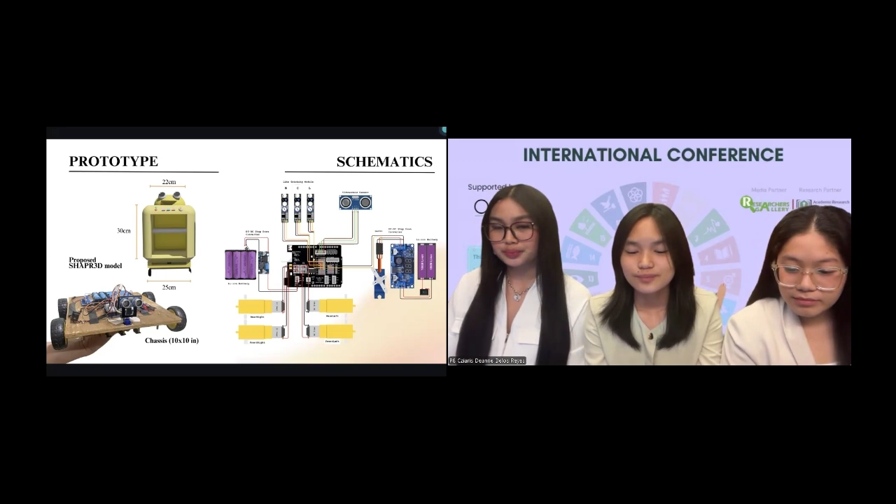The robot first starts from a starting point, and upon receiving a command from the button of the IR remote control, the robot follows a predefined track while continuously scanning for obstacles. Navigation decisions such as forward movement, turning, and stopping are determined by the program logic based on the real-time readings from the left, middle, and right line sensors. When the stop pattern, which is 111 at the delivery point, is detected, the robot stops and waits for a go-home command, then returns to the home point using the same line-following and obstacle avoidance logic.

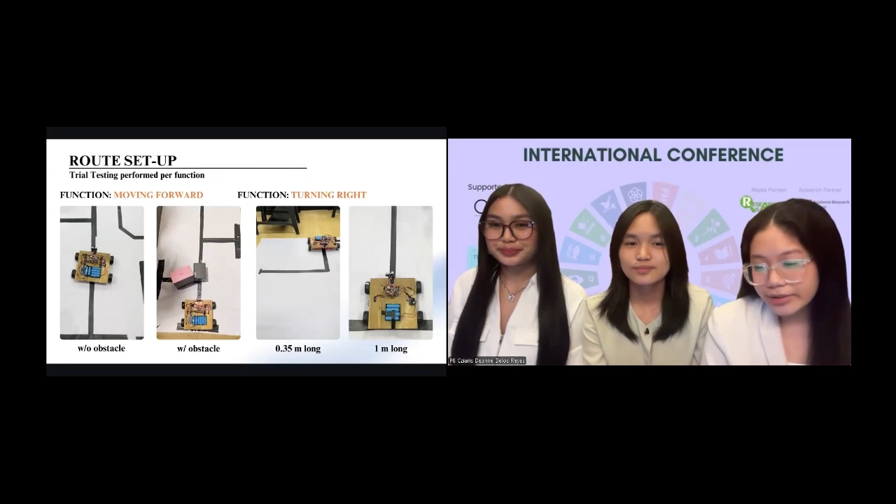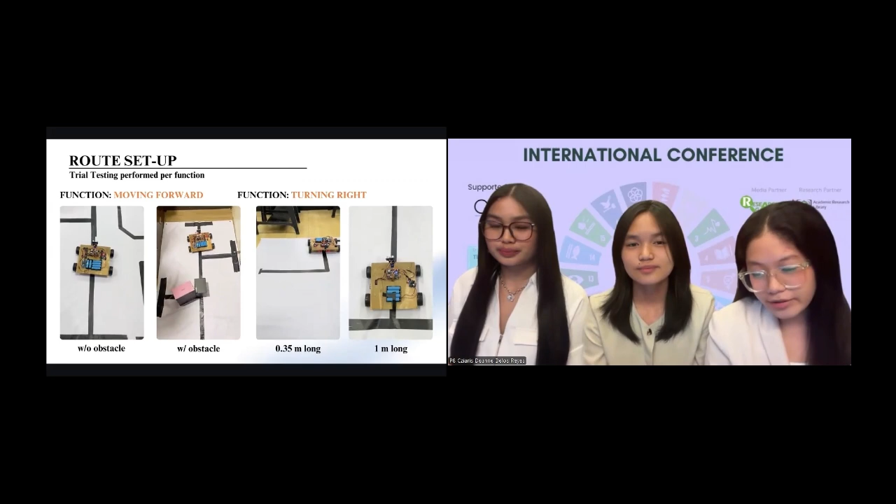As we proceed to data collection, the prototype underwent trial testing across 4 different conditions to evaluate its performance under various route distances. For our testing, we specifically performed the individual functions of moving forward and turning.

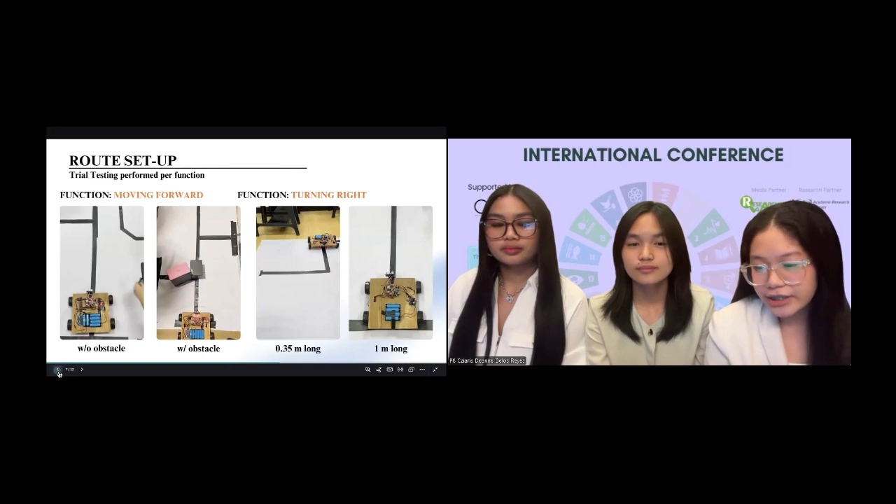For the function of moving forward, the robot achieved a 100% success rate without obstacles, demonstrating highly reliable and accurate path following under controlled conditions. Even with the introduction of obstacles, the robot maintained a 65% success rate, indicating a strong capability to adapt and navigate despite added complexity. This suggests the system remains functional and responsive in more challenging environments, supporting findings that mobile robots can sustain effective path tracking performance even as tasks require continuous adjustments.

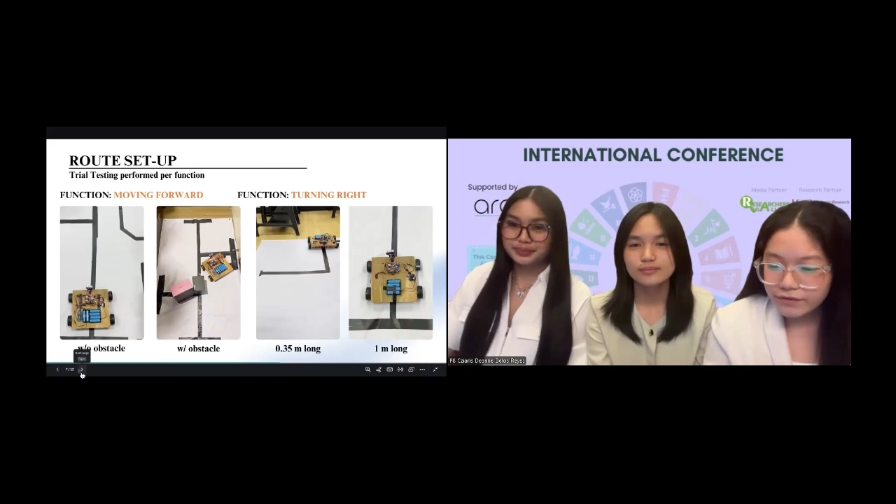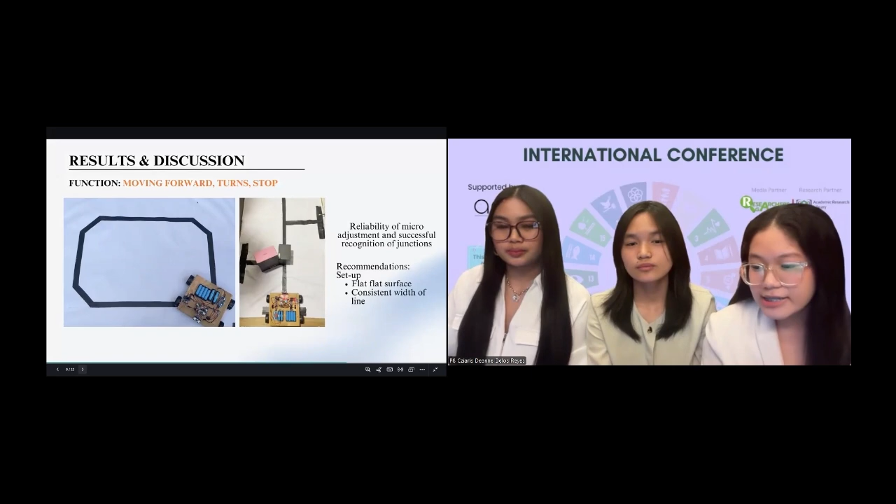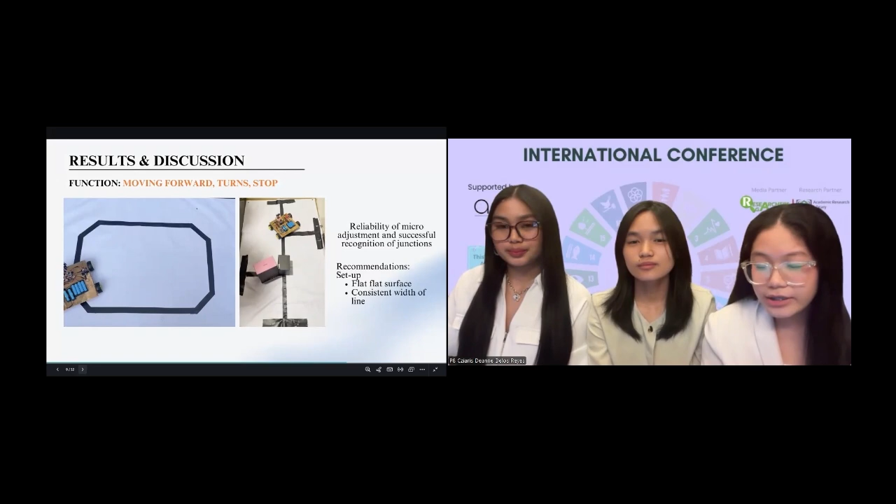For the function of turning right, the robot achieved a 95% success rate at a shorter route distance of 0.35 meters, indicating strong precision and consistency in executing turns over shorter paths. At a longer distance of 1 meter, the success rate decreased to 60%. However, this still reflects a moderate level of performance despite the increased complexity and longer navigation time. This suggests that the robot maintains its turning capability even as distance increases, though with expected variability due to accumulated path deviations. This is consistent with findings that path tracking accuracy tends to decrease as movement distance and track complexity increase.

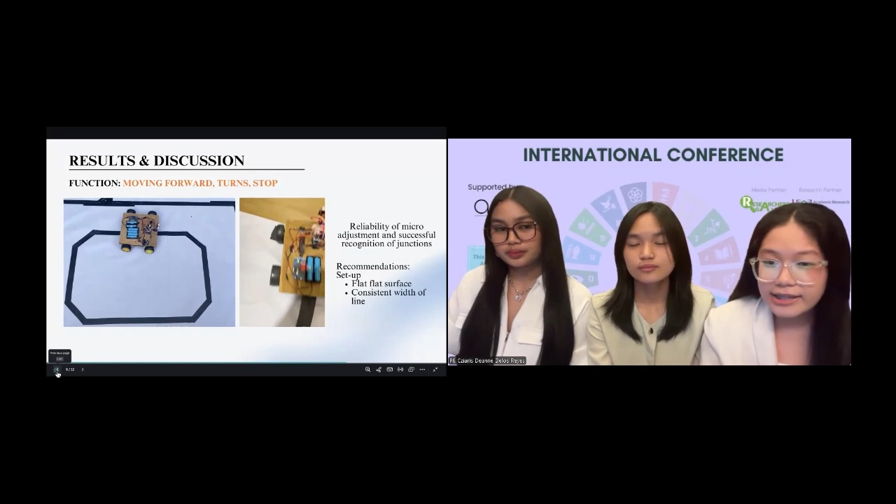Notably, the trials were divided into 4 sets with 5 trials each, and this set recorded the highest success rate among all sets, further supporting the reliability of observed results.

In addition, the prototype was tested along a continuous path to further evaluate its performance in a more dynamic condition, and as a result, the robot successfully recognized junctions during navigation, though it may rely on micro adjustments. From the data we gathered, this suggests that Kalinga is most effective in controlled or semi-structured environments, such as clinic pathways with minimal obstacles. At the same time, its ability to function under obstructed conditions highlights its potential applicability in real-world healthcare settings where minor obstacles are unavoidable.

In conclusion, this study set out to design and develop Kalinga, a robotic assistant capable of transporting basic medical supplies within healthcare facilities. The results demonstrate that Kalinga can reliably perform line-following tasks and maintain functional navigation even in the presence of obstacles, confirming its effectiveness in handling non-clinical logistical responsibilities. Additionally, this study highlights the practical potential of integrating affordable robotic systems into healthcare settings, particularly in supporting routine tasks and reducing the workload of medical professionals.

Moving forward, enhancements in obstacle detection, navigation accuracy over long distances, and system automation are recommended to further improve performance and adaptability. That would be all for our presentation.